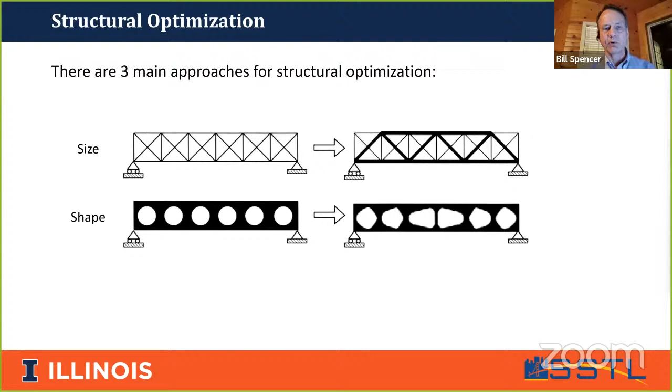In shape optimization, we basically have the form of the structure, but we can adjust the particular shapes. But in this case, we cannot add an additional hole or remove a hole from the structure. Then there's topology optimization. The first paper on this topic was by a Japanese professor who's at the University of Michigan and another professor in Denmark, in 1988. Their idea was that we should be able to choose the location and connectivity of the material so that it best fits the needs of our structure.

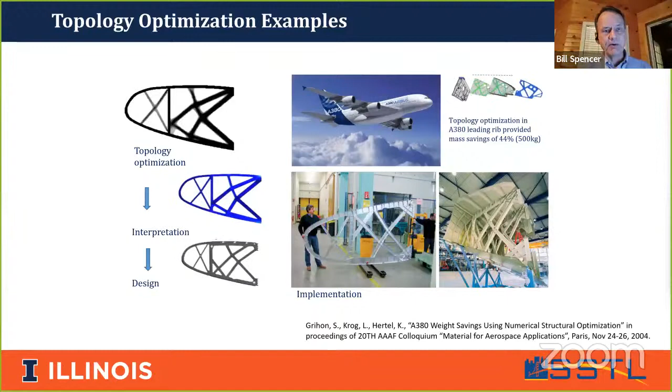Probably one of the most famous examples of topology optimization was for the Airbus A380, where they saved about 500 kilograms on the leading edge. There's also a number of structures in the civil engineering arena that have used topology optimization, including the Stuttgart Airport, more of a ground structures approach, and the Qatar National Convention Center. On the top right is some work of Bill Baker and Glaucio Paulino. Glaucio Paulino is now at Georgia Tech, but he used to be at the University of Illinois.

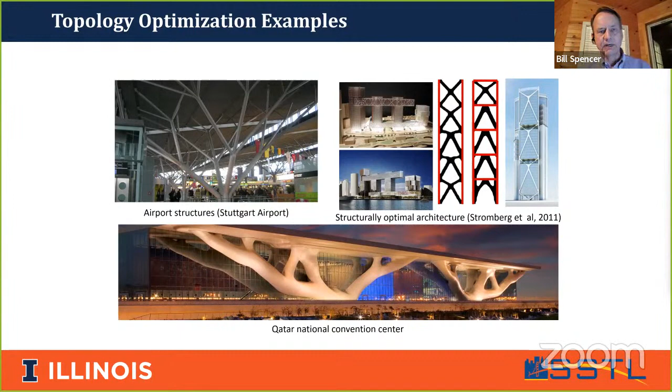For those of you who have interest, I might point you to this website - you may want to quickly write that down. There are a number of free programs where you can try topology optimization. There's a 99-line MATLAB code, and there's a number of apps you can put on your phone where you can apply the loads, select the domain, and see what the optimal topology is.

However, despite nearly 35 years of research, the majority of topology optimization applications only deal with static loads or simple deterministic dynamic loads. Topology optimization of structures subjected to stochastic dynamic loads has been very limited.

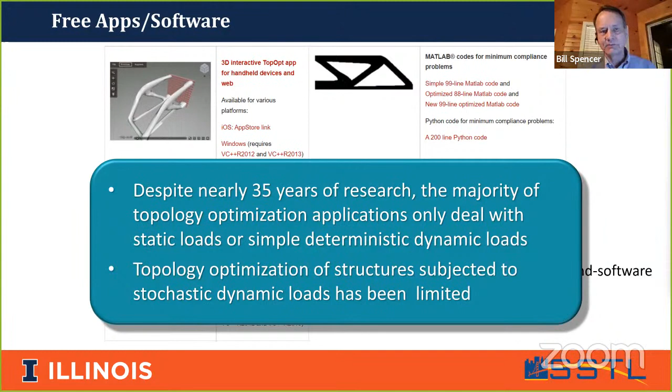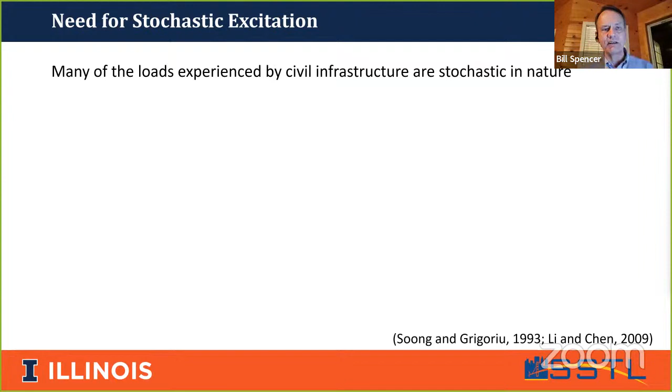Most of the loads that civil engineering structures experience are stochastic in nature. For example, earthquake loads, wind loads, wave loads, and traffic loads. So if we want to develop optimal topologies and forms for civil engineering structures, we need to take the stochastic dynamic nature of the loads into account.

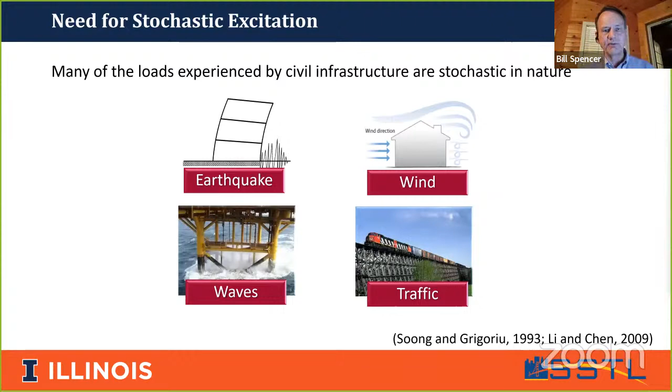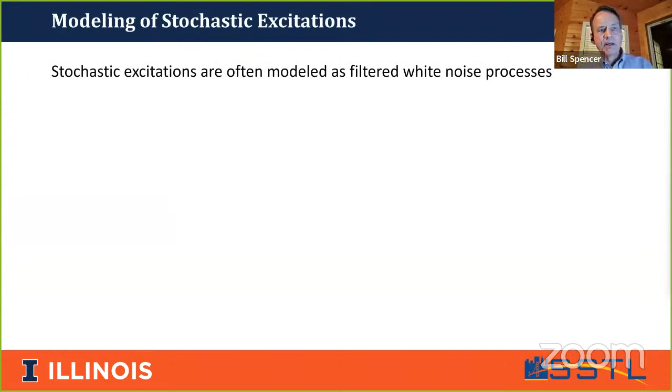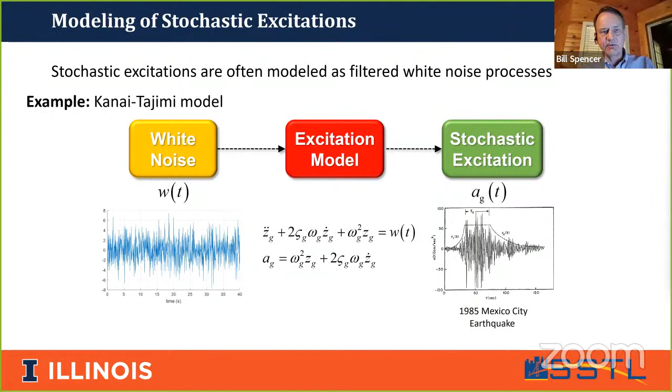Let me go through the problem formulation for how we deal with this. First is the modeling of the excitation, which we model as either a stationary or non-stationary filtered white noise. In this example, you can see the Kanai-Tajimi model, where white noise goes into an excitation model or filter, and the output is the stochastic excitation, which we may also put an envelope on to give the non-stationary nature of the excitation.

This can be generalized to not just a simple second order filter, but more complicated filters with vectored white noise inputs, so that we can even create random fields to represent the loads on our structures.

In the case of the Kanai-Tajimi spectrum, that filter in the red box would have the matrices associated with what I've written down here at the bottom. There's a book by Soong and Grigoriu, written in 1993, which gives a good overview of these types of stochastic models.

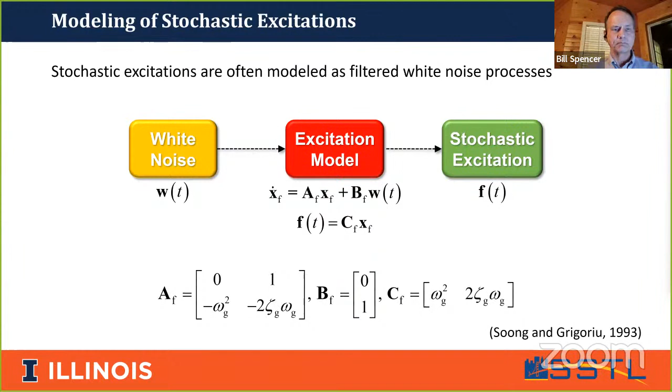So what we want to do is take that excitation model and input it into our structural model to obtain the stochastic structural responses. These two boxes in the middle, the red and the purple box, we combine together to create an augmented system. And because we have a white noise input, the responses are characterized by the covariance matrix.

This satisfies the Lyapunov equation, or the non-stationary Lyapunov equation. You might note that the stationary responses are algebraic equations, that is, static equations of the form F equals Kx. And the non-stationary response is governed by a simple vectored linear ordinary differential equation.

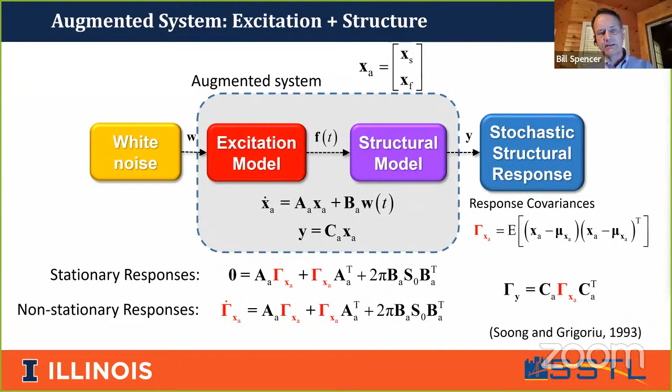Once I have gamma, then I can calculate the responses of any of the locations or the types of responses on my structure. And again, Soong and Grigoriu talk about this type of procedure.

Now we combine that with the topology optimization framework, where our goal is to find the element densities. In this diagram on the right, we're going to select the density of the elements. If it's white, that's the minimum density, equivalent to not having the structure there. If it's gray, maybe that corresponds to 50% density. And if it's 1, black, that would correspond to full density.

Our goal is to formulate some sort of objective function in terms of the stochastic structural responses, while making sure we satisfy the constraints. This objective function, J of Z, can be in terms of things important to structural engineers like displacements, interstory drifts, accelerations, or any of the degrees of freedom, maximum values, even failure probabilities. We have that formulation as some functional relationship as shown here.

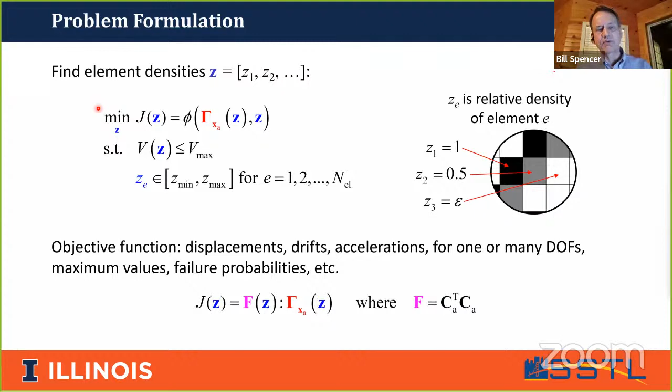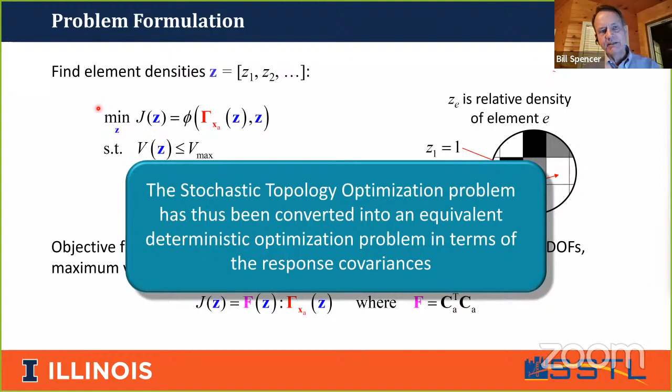So the covariances will be a function of the density variables Z. In doing it this way, the stochastic topology optimization problem has been converted into an equivalent deterministic optimization problem in terms of the response covariances. What that means is that we don't have to run Monte Carlo simulation.

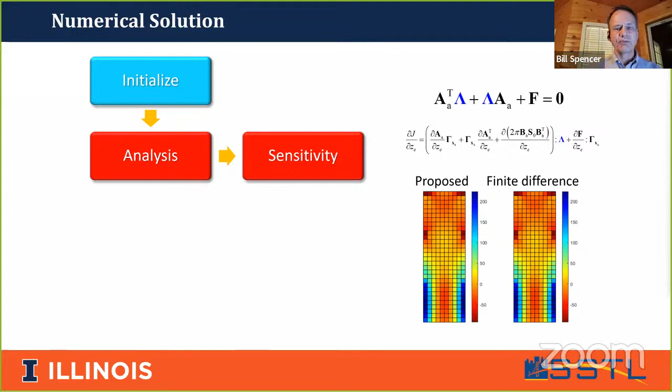So how do we solve this problem? We initialize the problem, then conduct the analysis using an alternating direction implicit method to solve the Lyapunov equation. We then calculate the sensitivities. This shows our proposed method, which is a solution of an additional Lyapunov equation, so the machinery we put together to get the covariances can also solve for the sensitivities. This compares the proposed approach to the traditional finite difference methods.

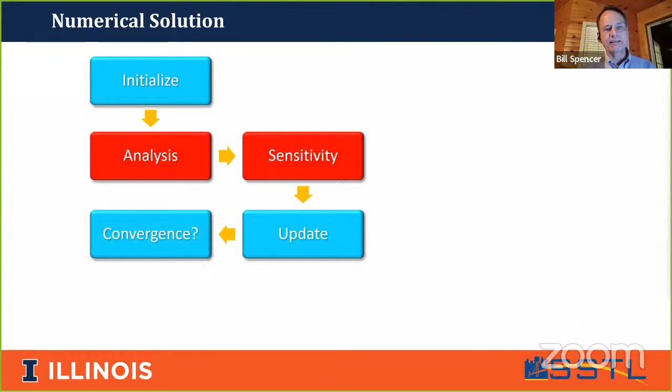We then update using standard method of moving asymptotes methods, and then we ask, is it convergent? If no, we repeat the analysis. If yes, then we've yielded the optimal topology.

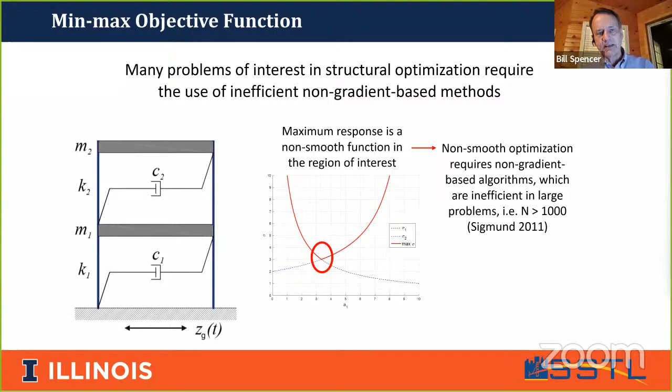Where you have that discontinuity, it generally causes failure of solution methods that are based on gradients. So what we do to solve this, there are non-smooth optimization methods, but they're generally inefficient, and for large problems, they fail.

So what we did, we looked at a couple approaches, but this KS formulation uses an approximation, a smooth approximation to the mini-max problem. This is the equation just for your reference. There's a parameter in there, rho, which we increase about every 10 iterations until we get convergence.

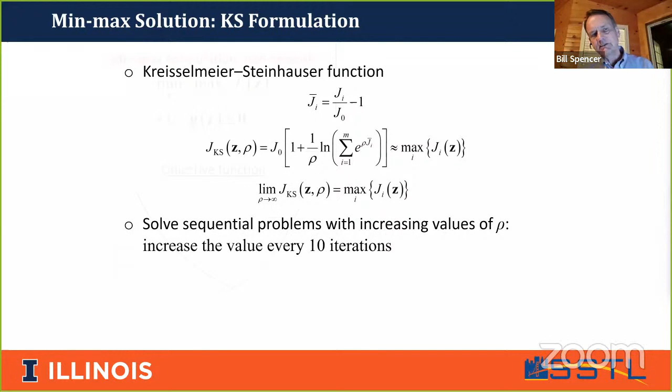Now it's easier to understand that in terms of a picture. The picture on the left is the actual objective function, the minimax objective function. With this KS formulation, we take the objective function and approximate it with the black line. We'll do several iterations to get close, and then increase rho. This is for rho equal 1, rho equal 10, and rho equal 100. So as we get closer, we can make a more sharp transition until we converge on the optimal solution.

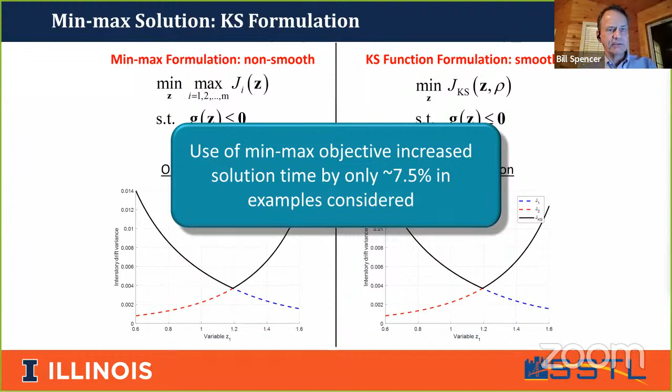One of the unique features about our work is we're often minimizing the maximum interstory drift, or the maximum of the variables that are of interest. So use of this minimax function, you might think that's going to increase my computational time tremendously, but it's only about a 7.5% increase in the computational time for the examples considered.

Well, that's probably a little bit more theory than what you bargained for. So let me now turn to the applications. The first application is a simple 3-story building to illustrate what we're looking at.

The volume constraint means 30% of the area can be material. If it were 100%, it would be entirely black. We're using Rayleigh damping and the Kanai-Tajimi spectrum for the excitation.

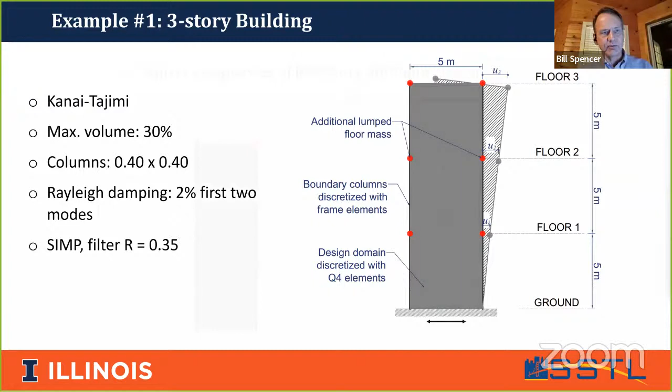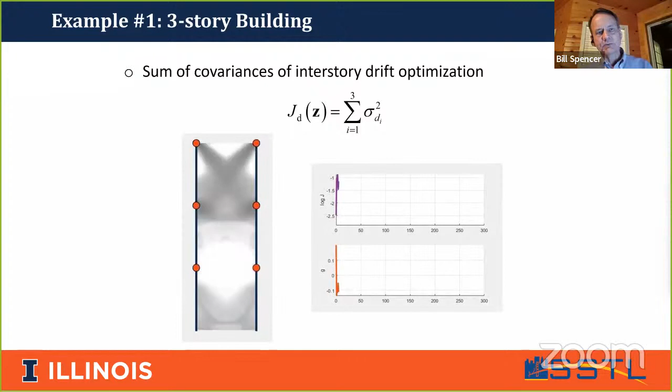This shows you, on top, the performance function, the objective function, and on bottom, the constraint. As we start iterating, the shape of the structure which best minimizes this interstory drift, it's the sum of the 3 variances of the interstory drifts, the structure is very quickly found.

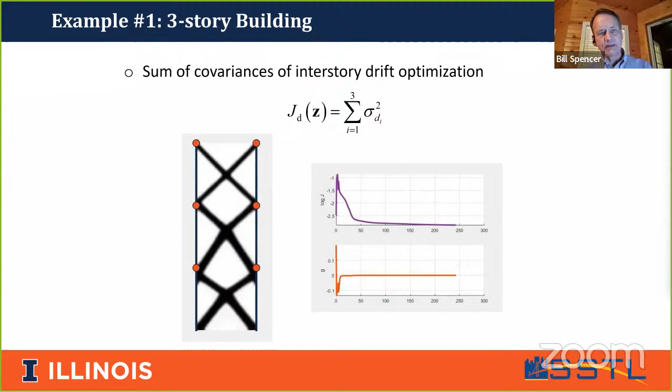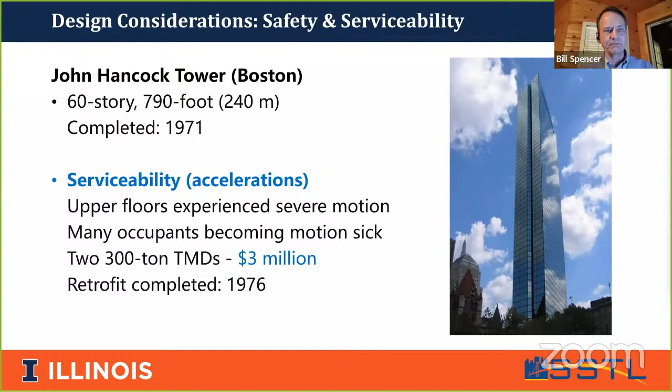So they had to retrofit this structure and install 2 300-ton TMDs to get the acceleration and displacement levels to be within reason. So the formulation we consider can not only accommodate displacement objectives, but you can include an acceleration objective also. So you can have different flavors of your design, considering accelerations and displacements, or some combination of the two.

The first structure considers only minimizing the displacements. The second structure has some weight, 0.2, on acceleration, and the third has more on the acceleration.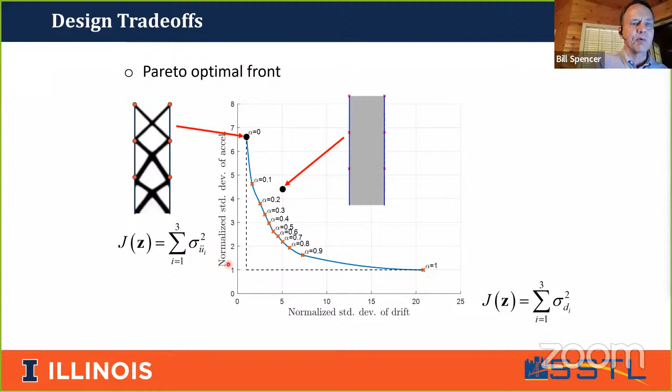What you see is that down here, these are infeasible designs. So anything in this upper region I can achieve, and this Pareto optimal front allows me to make the design trade-offs between minimizing accelerations and minimizing interstory drift.

Now let me move on to my second example. This is a benchmark building, a 9-story benchmark building that was designed by the SAC Consortium after the Northridge earthquake. We're again using the Kanai-Tajimi spectrum. We have lumped masses, and there are columns carrying the gravity loads on the left and the right.

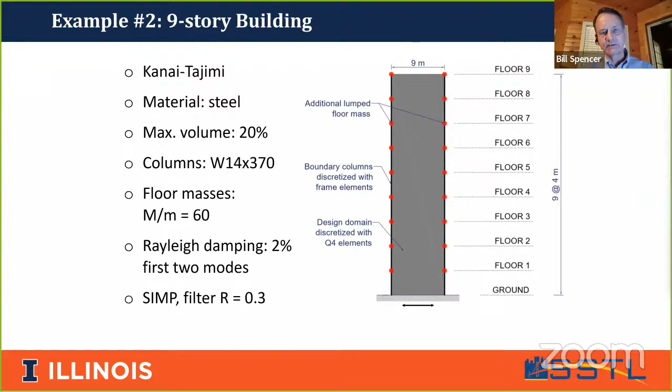And what we're looking at is to consider the bracing system. So what we have here, I wanted to show you, what if we just minimize the static compliance. That corresponds to this blue line.

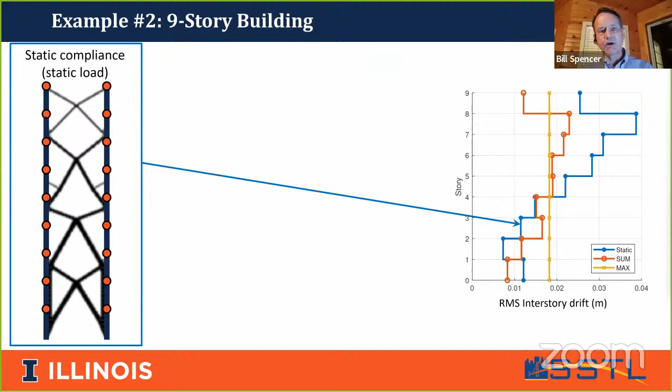And what you see is that if we're going to minimize the static compliance, then the interstory drifts at the lower floors are very good, but at the upper floors, I have quite high interstory drifts.

If I'm going to minimize the sum of the variances, which is what's done by many people, and what I showed you in the first example, I get the red curve. And what you see is that we get good performance, better than the static compliance problem, but we still have higher interstory drifts on the upper floors.

If I solve the mini-max problem, which I showed you earlier, then I get equal interstory drift on all floors. So this is the optimal design for the mini-max problem.

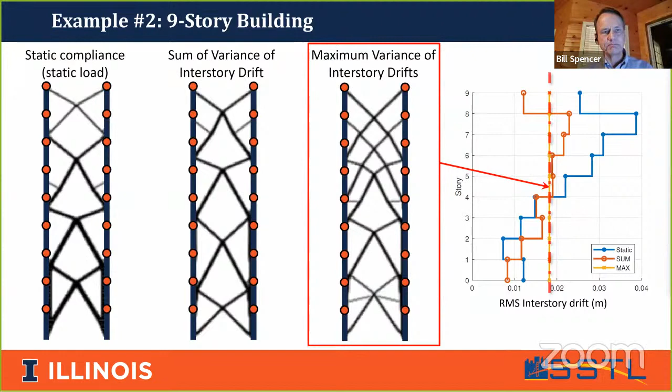Now let's look at another problem. This is, again, a benchmark structure, a 20-story benchmark structure designed by the SAC Consortium in California after the Northridge earthquake.

We looked at only the above ground floors. We didn't model the 2 basement floors, and we're just modeling one plane of the moment frame. So it's 20-story, 5 bays at 4 meters each for the floors, and then 6 meters per bay. Steel construction, we've got a volume of 20%, and the columns vary linearly.

So Rayleigh damping, 2% in the first and second mode, and our goal is to minimize the variance of the maximum drift. I want to point out this particular building and the associated code was developed by Professor Ohtori, who visited me in the late 1990s at Notre Dame.

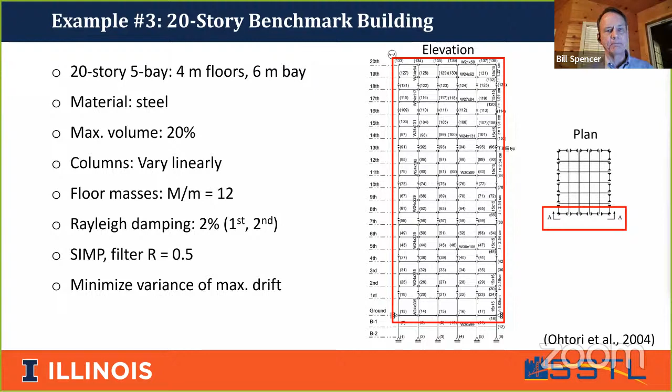So we looked at 2 soil configurations. First is the medium soil configuration, and we assumed here a rigid diaphragm in the floors. And you can see a very nice mega brace configuration.

So then we considered, well, what if we had firm soil? What you see is that the design is by and large the same. So what that says in this case is that the design of this mega brace system is not very heavily related to the assumptions on the input earthquake.

Now, this was for the rigid diaphragm assumption. What if we considered a flexible diaphragm? What you see, and I'll switch back here, because of the rigid diaphragm up in the upper floors, we don't need to have much additional bracing.

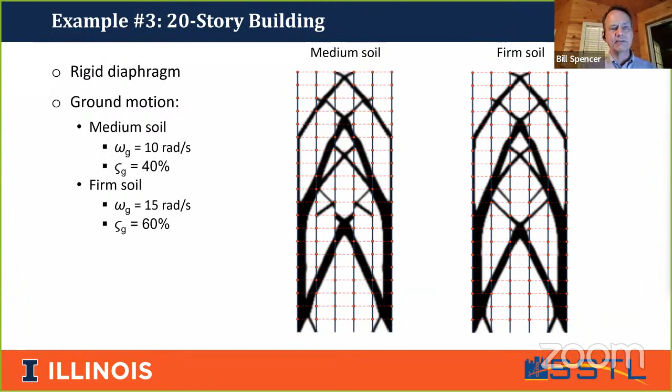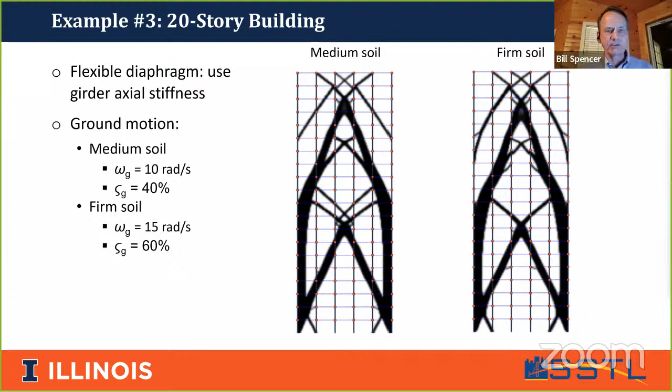But when we have flexible diaphragms, you can see that additional bracing is required to tie the various column motions at the top together. This is the medium soil, and this is the firm soil. You can see that, again, there are some differences, but by and large, these 2 structures are similar.

So what we wanted to do was to consider the case where you excited the structure designed with the firm soil by the medium soil excitation. And you see that you don't get perfectly equal variances of the interstory drifts, but it's not off too much.

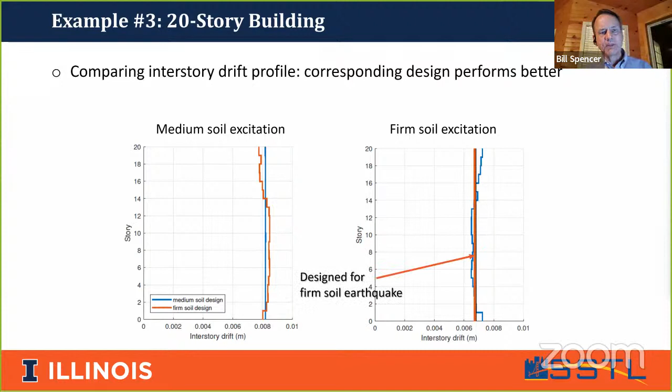The optimal design, that is when you have a medium soil excitation and you've designed for that, gives you the optimal equal interstory drift variances. Similarly, if we have a firm soil excitation, a higher frequency excitation, if you design for the firm soil, then you get equal interstory drifts.

And if you... so what this says is that our designs are robust to the earthquake parameters.

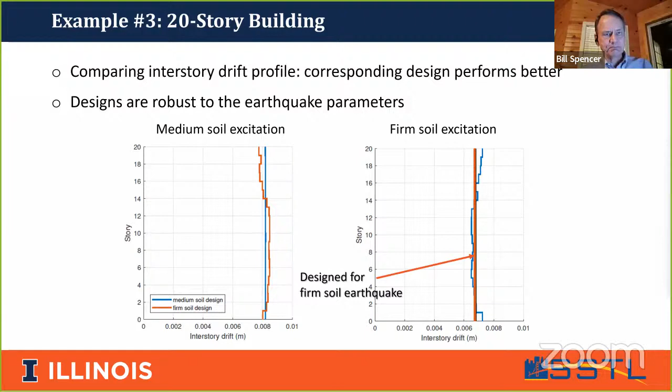I want to turn now to topology optimization and damper placement as a simultaneous optimization problem. And we found some very non-intuitive results here. So this is the building.

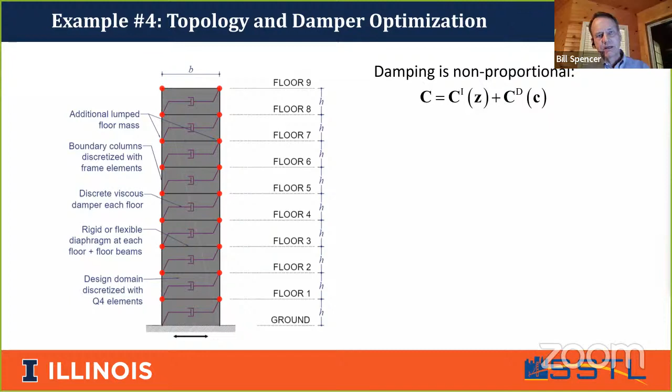We have both intrinsic damping, and we also have discrete dampers that are placed in the building. The discrete dampers are proportional to the interstory velocity, and will minimize the response of the structure by placing the material and the dampers at appropriate places in the structure.

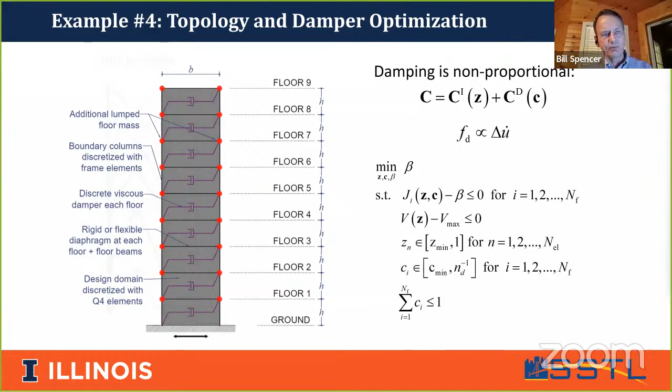Let me show you more specifically. This is the design if we just optimized the topology. Now, if we went in after the structure was designed, after the topology was optimized, and we placed the dampers to minimize the interstory drift, these are the location and the size of the dampers which would minimize the interstory drift. That's a little bit surprising.

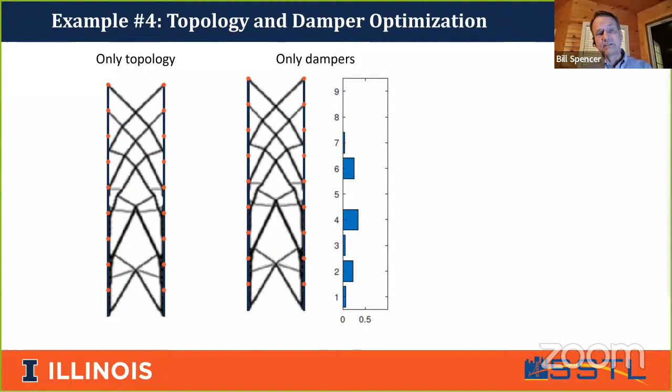We always think of having the dampers on the first couple of floors. Now, if we simultaneously optimize the topology and the dampers, you can see that we get different types of topology. Here you can see this bracing has changed down here. The supports in the upper regions have changed, and the distribution of damping has changed.

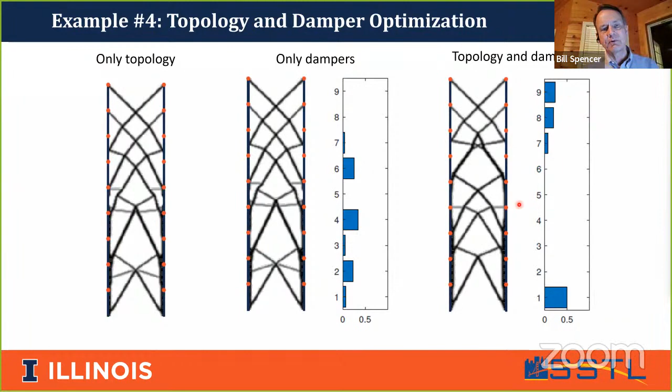You want one large damper on the ground floor, and then some damping at the top to keep those from flapping around. As a matter of fact, if we look at the comparison of the various responses, this simultaneous optimization of topology and damping gives us equal interstory drifts. Now, if you did independent optimization of the topology and the dampers, you still do pretty well, but you're significantly higher, maybe 10 to 15% higher than if you did simultaneous optimization.

Now, we thought we'd also look at some traditional approaches for installing dampers. This is putting all of the damping on the first floor, and you can see it reduces the first floor displacements, but the upper floor interstory drifts are still large.

Here, this is putting dampers on the first and second floor, and we have still similar problems. Or uniform dampers throughout the structure.

And you can see the green here, we still have interstory drifts at the upper floors that are large. So the conclusion here is that simultaneous optimization of topology and damper locations and sizes yields non-intuitive solutions that are significantly better than other common approaches.

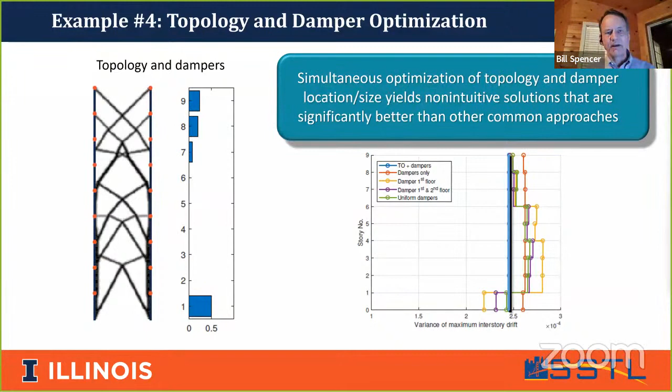Let me turn now to wind-excited structures. I was very happy to see Professor Tamura in the audience, and I'm intimidated a little bit because of having one of the world experts in wind engineering in the audience today.

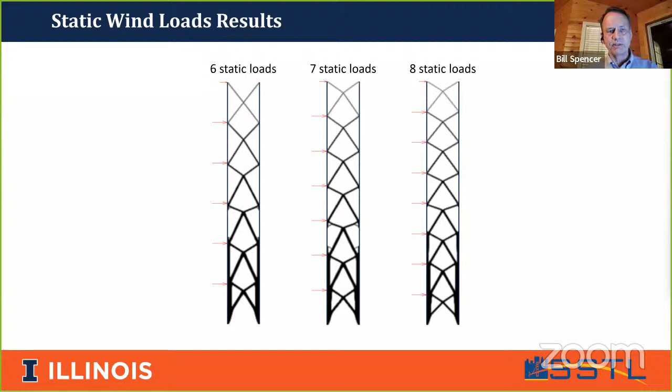Now, if they had discretized the wind load into 7 static loads or 8 static loads, you get a different structure each time. So as you might imagine, you shouldn't have the optimal topology depending upon how you discretize your structure.

So what we have done is we've looked into modeling stochastic wind fields. I think I saw also Professor Xinzhong Chen from Texas Tech on the meeting today, and he helped us a lot in understanding the stochastic modeling of wind effect of the wind fields.

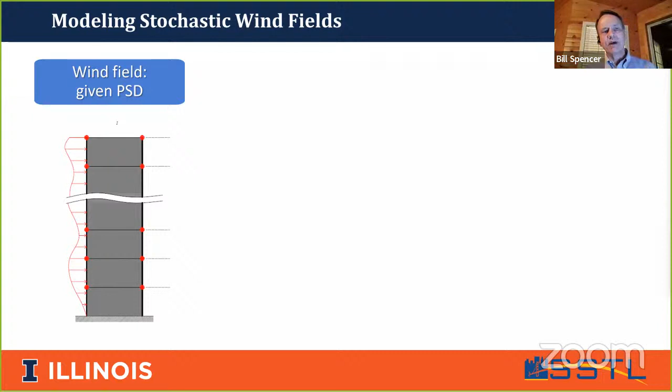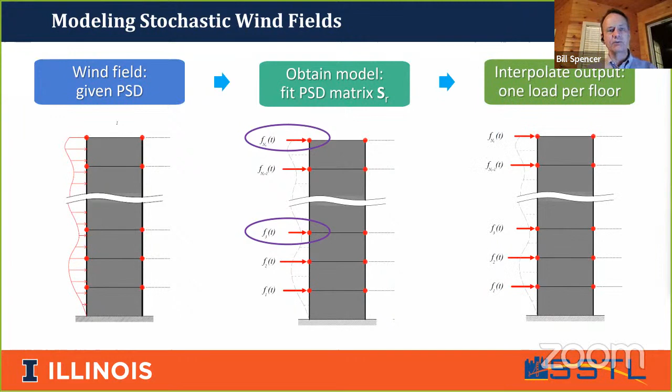And so what we would do is you have a given power spectral density of the wind field. We then obtain a model by doing curve fitting in the frequency domain of that power spectral density to get n discrete loads on the structure. And then we interpolate those loads at 1 per floor to give us the wind field.

And so what I'll show you today, this is a 76-story benchmark building. It was first proposed by Professor Jann Yang in 2004. I'm sad to say that he passed away earlier this year, but he was one of the great people in structural control theory. And it happens to be that he was the student, the first PhD student of Professor Shinozuka, Masanobu Shinozuka.

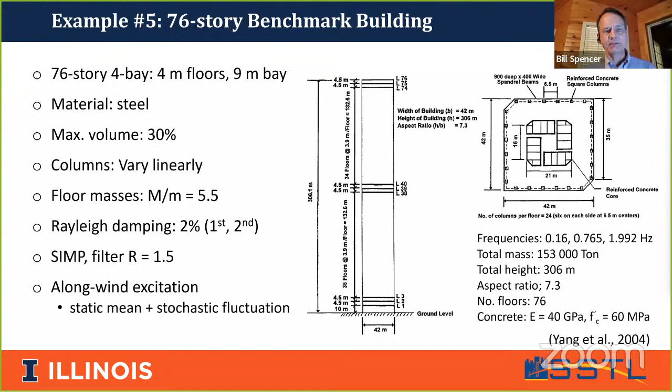So we're going to look at this 76-story benchmark building, and we're going to consider the along wind excitation, which is the static mean plus the stochastic fluctuation. And this is what you would get if you look at the RMS interstory drift.

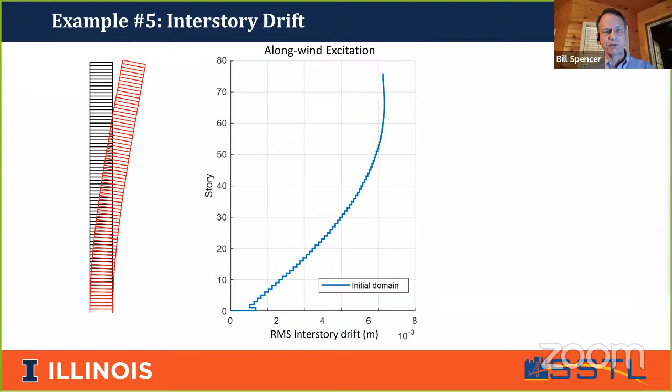Interstory drift, what it says is that the interstory drift at the top of the building is larger than the interstory drift at the bottom of the building. That's counterintuitive for most structural engineers. So let's look at what's happening, what's being done there.

At the lower floors, you can see, because for a very tall building, the primary deformation is bending. Some shear, but bending may dominate. And so you can see that at the lower floors, the interstory drift, if you just take U2 minus U1, it's going to be almost zero.

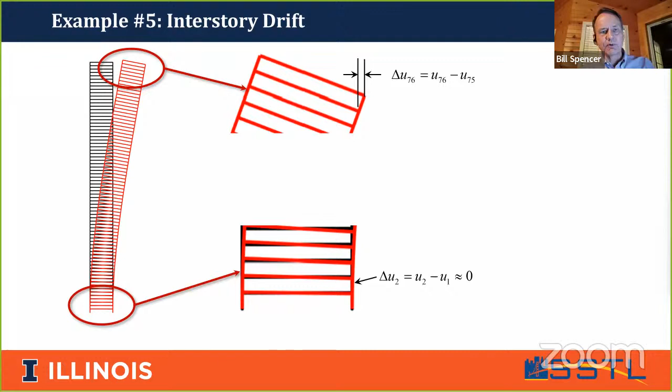But at the upper floors, because of rigid body rotation, you're going to get an apparent large deflection, large interstory drift at these upper floors. And so what this means is the apparent large interstory drift at the top of the building is due to rigid body rotations.

So we went ahead and we did a topology optimization minimizing this interstory drift, which is just the relative distances that the two nodes have moved. And you can see that we get, actually, it's a quite attractive topology, and the interstory drift as measured here is reduced substantially.

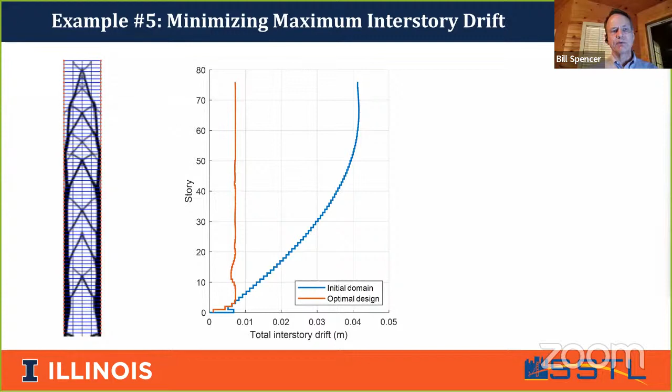But there's been some work by a number of researchers. This is the paper where we first saw it at the World Conference on Earthquake Engineering in 2012, where they talked about the total interstory drift being comprised of rigid body rotation plus shear deformation.

And what they did is they took that rigid body rotation from the I-1 floor, from the lower floor, and then they projected what was called the harmless interstory drift. And then they subtracted that out from the total interstory drift to get what's called the harmful interstory drift, due primarily to the shear deformation.

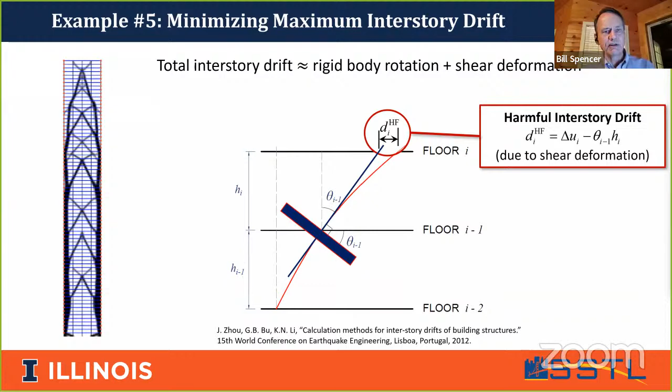So if we look at the total interstory drift in this structure, in this design, the blue line, then it seems quite good. But if you look at the harmful interstory drift, we end up with large lower floor harmful interstory drifts and very small harmful interstory drifts on the upper floors, which is intuitively what we might expect.

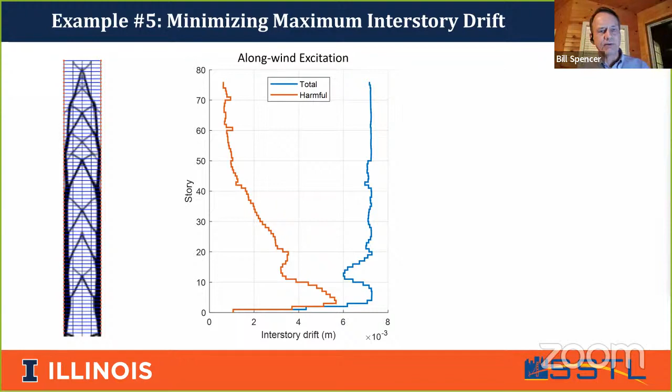But the question is, what if we wanted to minimize the harmful interstory drift in our optimization? So in this example, we're going to look at the along wind excitation, and we're going to look at three design objectives. One is minimizing the roof displacement, which is oftentimes done in structural engineering design. Another is minimizing the maximum harmful interstory drift. And then a combination, because there's good things that come out of minimizing the roof displacement, so we're looking at a combination of these two objectives.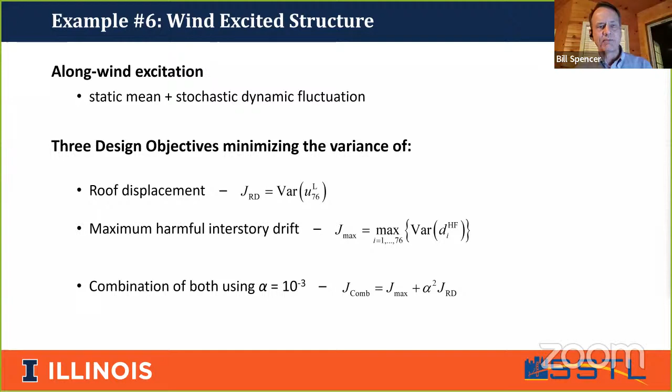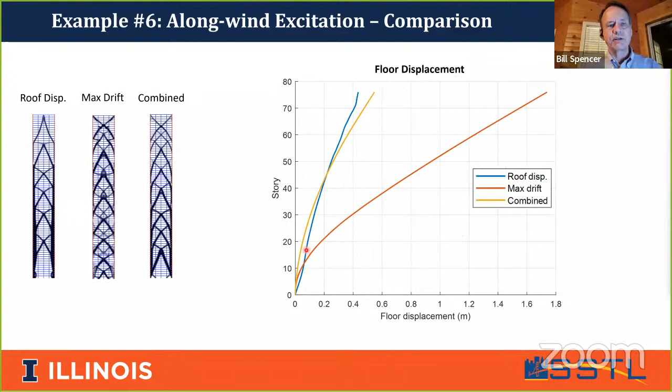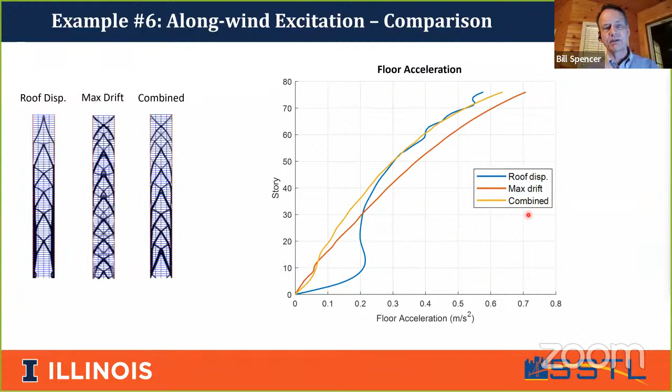But the combination of minimizing the linear combination of the roof drift plus the harmful interstory drift gives us very good floor displacements or rooftop displacements, plus we get exceptionally good floor accelerations. If we minimize the roof displacement, we get large accelerations at the bottom, smaller accelerations at the top. If we minimize the maximum harmful interstory drift, we get larger accelerations, not too bad. But the take-home message is if we use the combined objective function, then we get the best of all worlds.

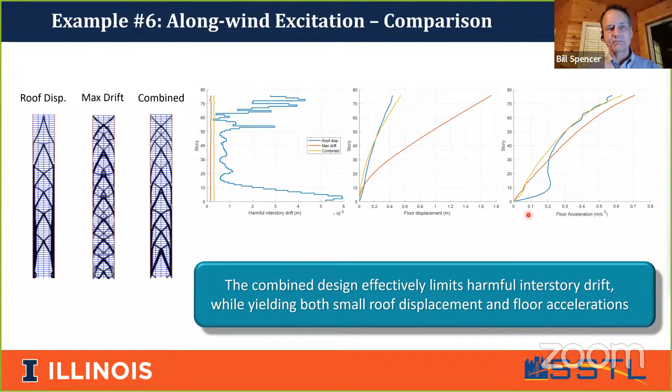So this gives us a design that limits the harmful interstory drift while yielding both small roof displacements and floor accelerations. Now, what is going on there? This is just showing you the modal participation factors for the roof displacement. It's almost entirely a first mode response, whereas the harmful interstory drift has numerous modes that contribute to the response. And so as a result, we can use this trade-off to shape the behavior of the structure.

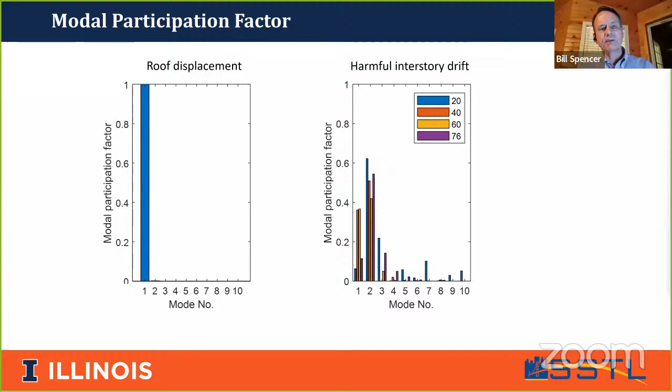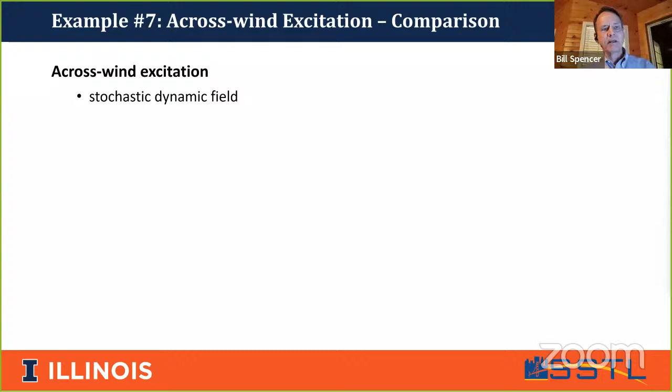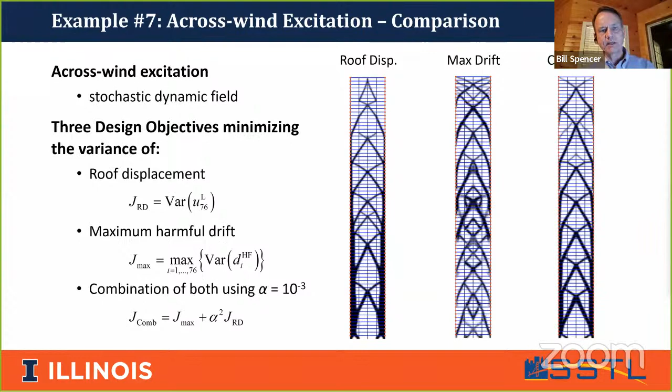So with that, I'd like to make a few concluding remarks. First, I hope to have shown you today that we have a general optimization framework to obtain topologies of structures subjected to stochastic dynamic loading.

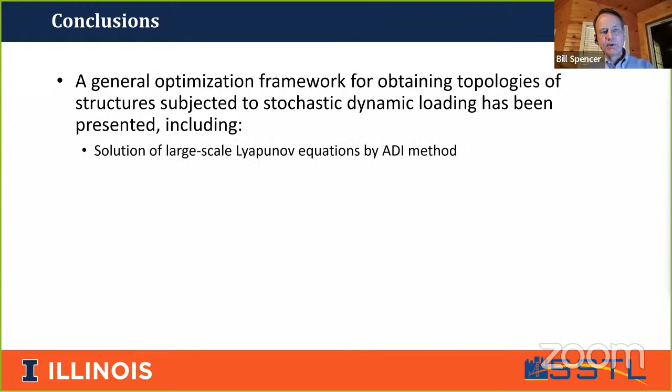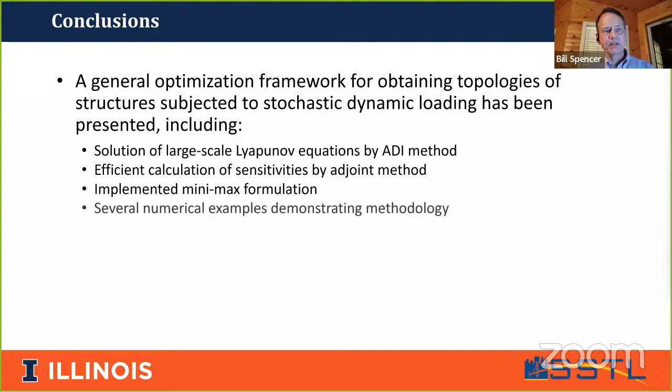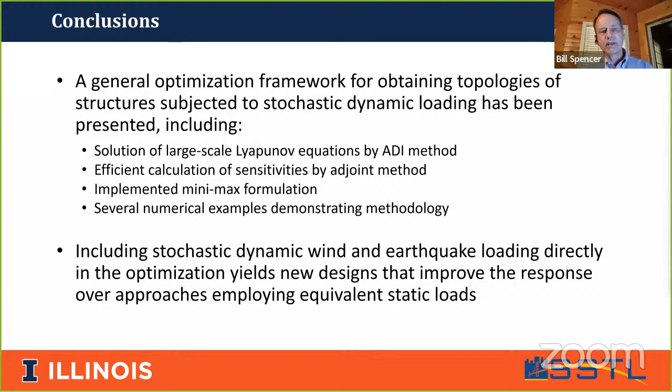I showed you the solution of the large-scale Lyapunov equations by the alternating direction implicit method, efficient calculation of sensitivities by an adjoint method, implemented a minimax formulation, and looked at several numerical examples demonstrating the methodology. Including this stochastic dynamic wind and earthquake loading directly yields new designs with improved response over approaches employing equivalent static loads. In the future, we're going to extend the damping

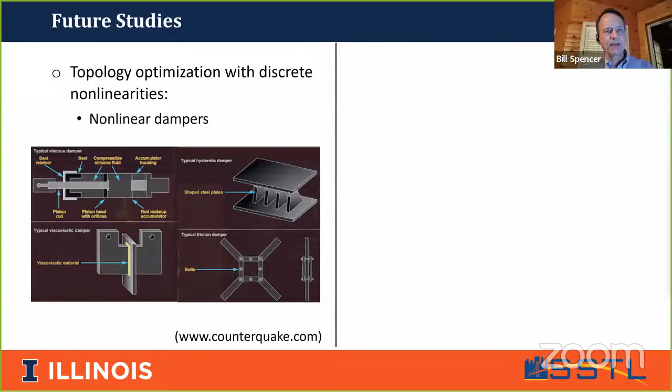optimization to include nonlinear dampers, such are very popular today. We're also going to extend this work to 3D topology optimization. And we're going to look at robust topology optimization so that we can account for uncertainties in the building parameters as well as in the excitation.

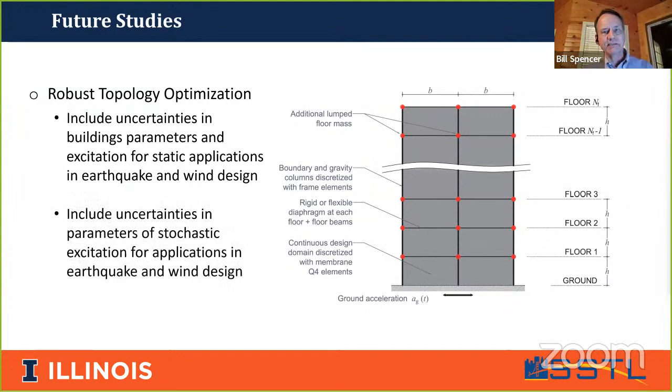My two collaborators on this work were both my PhD students. The first is Fernando Gomez. He's now an assistant professor in Ecuador at the best university there. He graduated about a year and a half ago. And Juan Carrion, he graduated with his PhD in 2007. He's a professor in Ecuador, but he's also a full-time engineer at Skidmore, Owings and Merrill, SOM, working remotely in Ecuador.